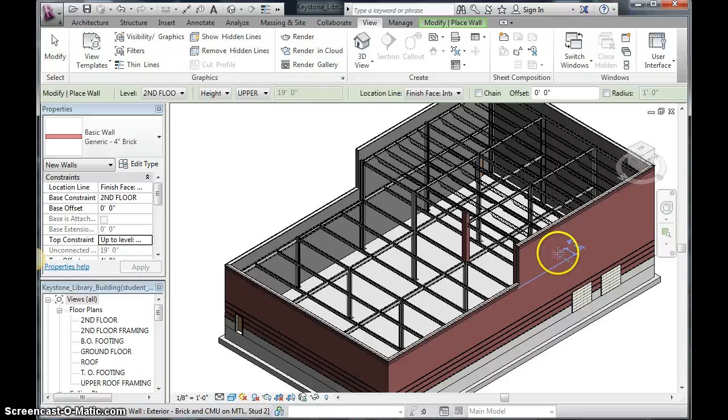So here is a video for how to wrap the columns. You can see that I've already wrapped a couple of them. I'm in 3D view mode. Let's set it to 3D view top, and I'll show you how to wrap these. You can see that I wrapped mine with just a 4-inch brick. If we do it with anything more than that, it's structurally not sound and will cause structural problems with the building. So we're going to leave it as that.

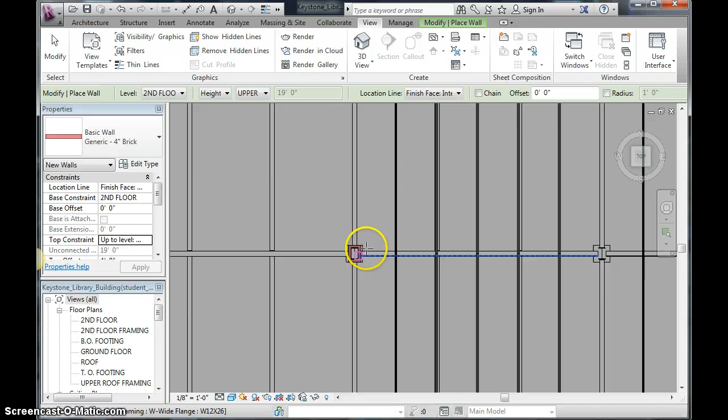If I go up to this column that has not yet been wrapped, we'll go to this one here. Ooh, look at how ugly and thick those lines are. Let's go to View and click Thin Lines. Pretty, that's much better. Now I'm going to go back to Modify and Place Wall.

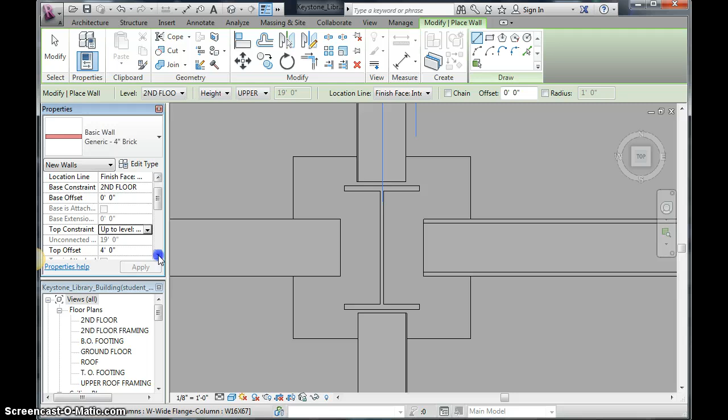I have mine set to Basic Wall 4-inch brick. We are constraining from the second floor up to upper roof framing, and we need to have a 4-foot top offset so it goes beyond the framing material and sticks up above, just like the outside walls do. That's why you have a 4-foot offset.

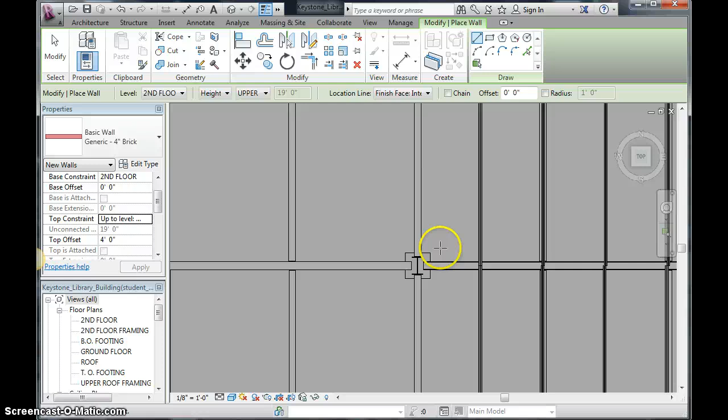So we'll go back to this. I've already wrapped those bottom 2 columns, so we'll wrap this one here. You can do this a couple different ways, as lines or as a rectangle. I'm going to do it as a rectangle.

Make sure that you're set to Finish Face Interior, and that you start from the bottom left corner. It'll always draw to the left. So you can see when I click this, and let me zoom in a little bit more to make sure I get that corner. You can see that it's drawing to the wall to the left over here.

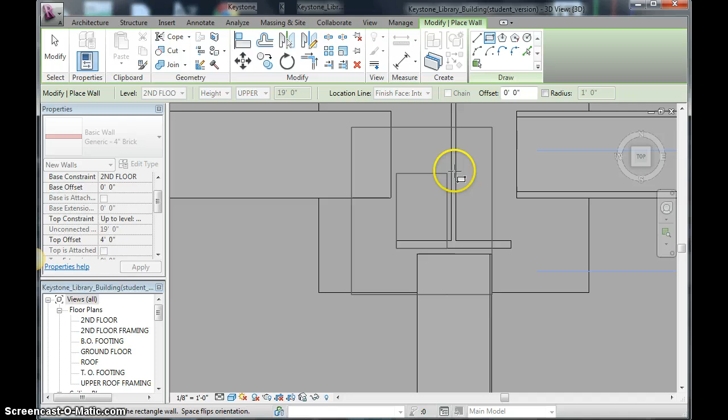So we'll zoom out a little bit, hold the mouse wheel in and click and drag, and zoom into this so that I can snap to that corner. And there we go, so it's drawn.

Now I have mine set to consistent colors or shaded, one of those. I think mine's set to shaded. That way I can actually see the color of that. It does make it a little bit easier.

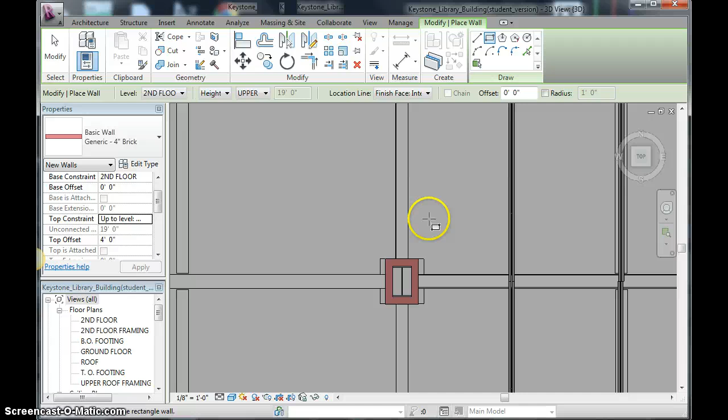So I'm clicking the mouse wheel, holding it in and dragging it to get to the top one here. Now this one I don't want to wrap because I'll end up inside this wall, so I'll just do the line here. Now if I start from this edge and draw up, you can see it's drawing the wall inside that I-beam. That's bad.

So I'm going to click Escape, and I need to actually start from this corner and come down. Then you can see it travels to the outside. So you're drawing in the inside face. That's what Finish Face Interior means.

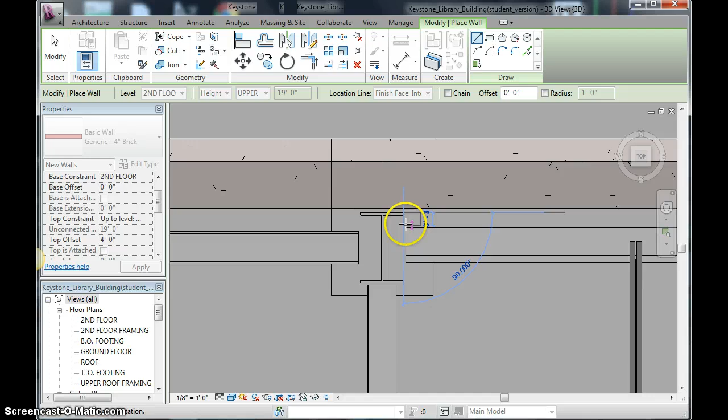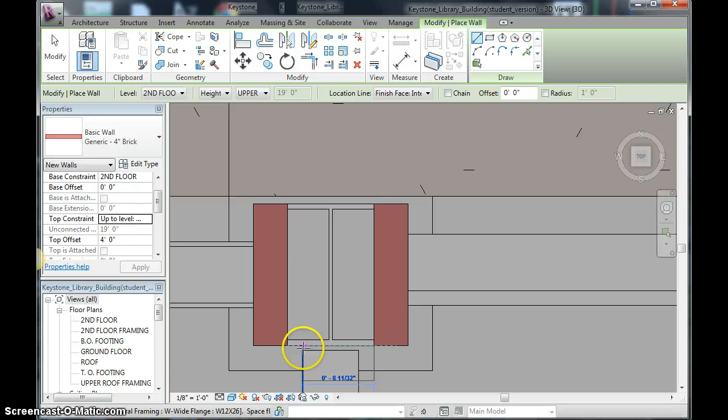And I'm going to zoom in because it's hard to get the corners unless you zoomed in. There we go, click to this corner, and click to this corner. Now I can see that wall didn't show up. Not sure what happened there, so I'm just going to add it in there. There we go, and that's good.

Now I need to use the Align tool to push this wall up to here. So I click, and you can see, depending on where I go, it'll select this entire wall. You see the 2 blue lines here. Or now it just selects the bottom line. I want to select the bottom line.

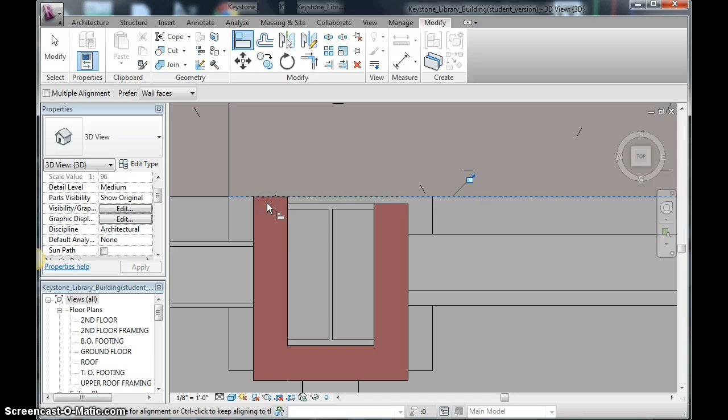I'm going to constrain the wall, the brick wall, to this. So click here first, and then click to that, and it pushes it there. Now do the same thing. Click this wall first, and then it pushes it there.

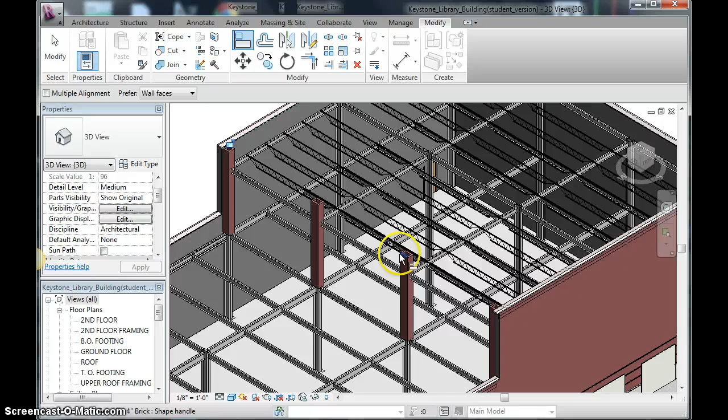Now we should have everything that we need. All of our columns are wrapped. In normal construction, you would cap this so that hole is not there. So we'd cap that and put some flashing on it and cap it, and then it'd be all good. So we might do that later on. There is your wrapped columns.